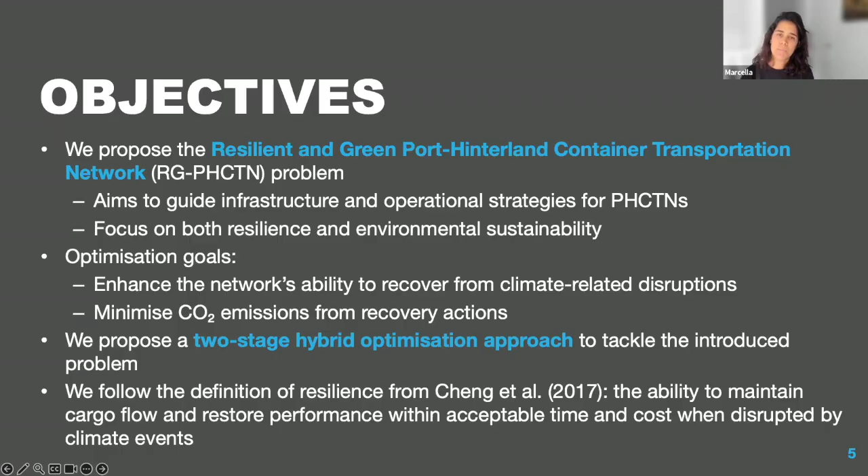Resilience is a term whose definition varies a lot based on the area of research. So we follow the qualitative definition of resilience proposed by Cheng et al., which describes the resilience of a PHCTN as its ability to maintain cargo flow and restore performance through recovery actions within acceptable time and cost when disrupted by CCD events.

So to summarize, the main goal of our new optimization problem is to optimize resilience while also reducing the emissions associated with the recovery actions that we adopted to improve resilience. So I explained the qualitative definition of resilience that we use, and we also adopt a quantitative definition of resilience, which was proposed by Chen and Miller-Hooks. And you can see this mathematical expression on this slide. And just to explain how this definition works.

So in our model, we represent the set of all possible CCD cases by the uppercase Greek letter Xi, and each element, each lowercase xi, corresponds to one sample realization of a disruption type. For example, one instance of flood with specific spatial and intensity parameters. And then in this context, the resilience of PHCTN, which is expressed as a function of lowercase xi, is defined as the ratio between the total number of containers successfully delivered after the disruption and the total demand across all dry ports.

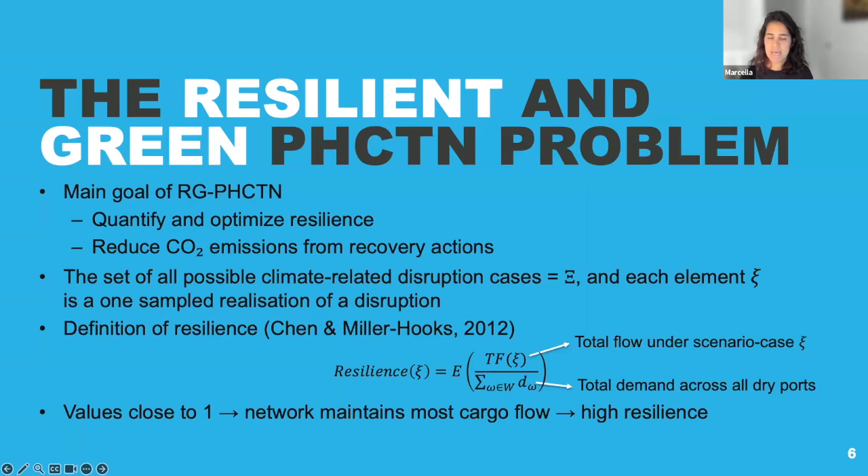To calculate the resilience of a PHCTN, we use a two-stage hybrid approach. It is called two-stage because it consists of two sequential MILP submodels: the seaport disruption response model, which we refer to as submodel 1, and the hinterland disruption response model, which we refer to as submodel 2. Submodel 1 focuses on the seaport level. It determines which recovery decisions are implemented, and based on that, it calculates the restored throughput capacity of the seaport.

Then, given this restored capacity, submodel 2 determines which recovery actions are adopted by hinterland shippers. And based on those decisions, the model calculates the actual container flow arriving at the seaport. The interaction between these two models is important, and I will explain why later on. We also call this approach hybrid because it combines optimization with simulation. Those two MILP submodels are optimization models.

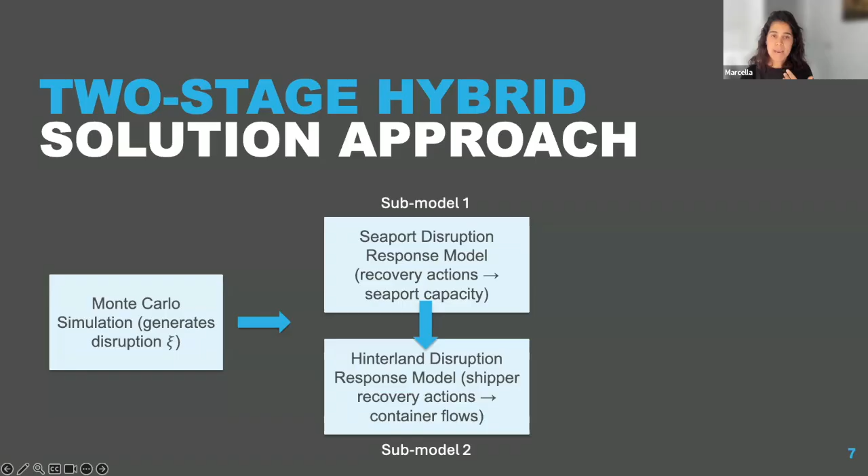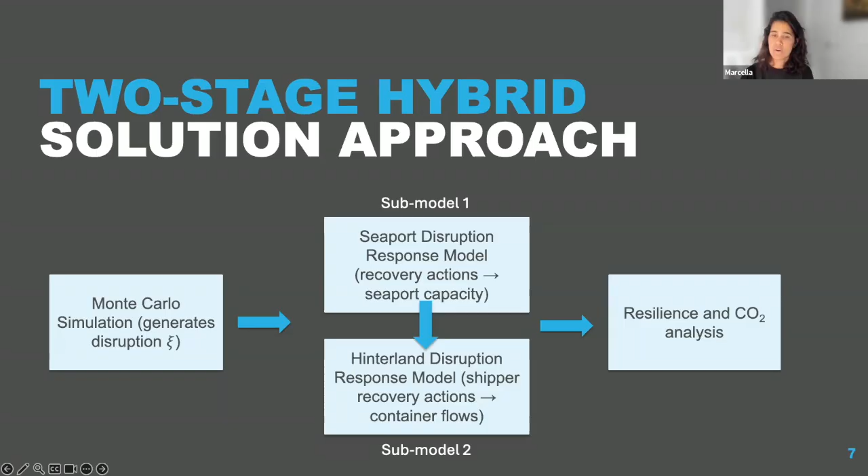And then we use Monte Carlo simulation to generate multiple realizations of each CCD scenario type. For each realization, we solve both MILP models sequentially. And by repeating this process for all realizations of a given disruption type, we can then calculate the expected resilience of the PHCTN across the entire scenario space. So let's quickly look at those MILP submodels to understand them a bit better.

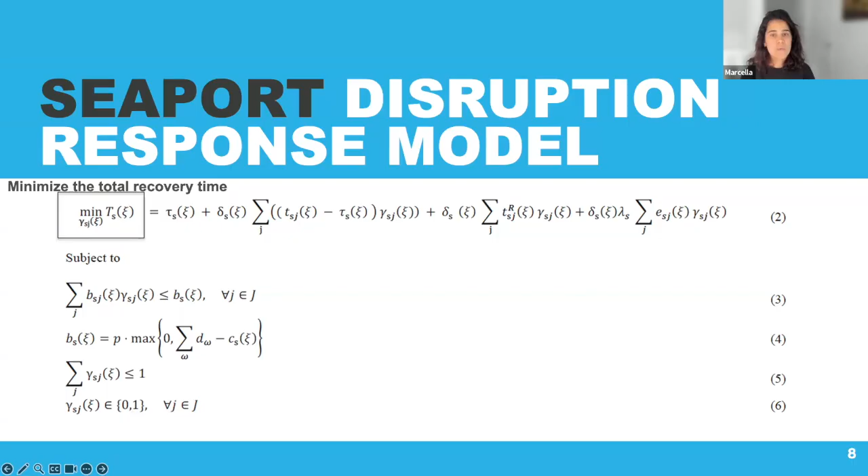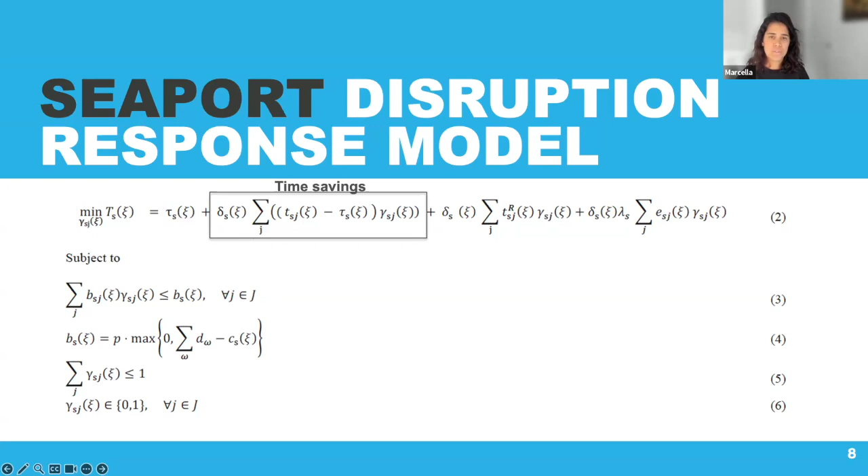Starting with the seaport disruption response model, which is the first one that we solve in our two-stage approach. The model objective function aims to minimize the total recovery time at the seaport after a disruption has occurred. And we can break down this objective function into different components. The first term represents the current operation time of the seaport after the disruption, so before any recovery action is taken. The second term captures the time savings achieved by implementing a specific recovery action j, and this variable gamma sub sj indicates whether the action is selected or not. So this term only contributes if the seaport is damaged and if that recovery action is chosen.

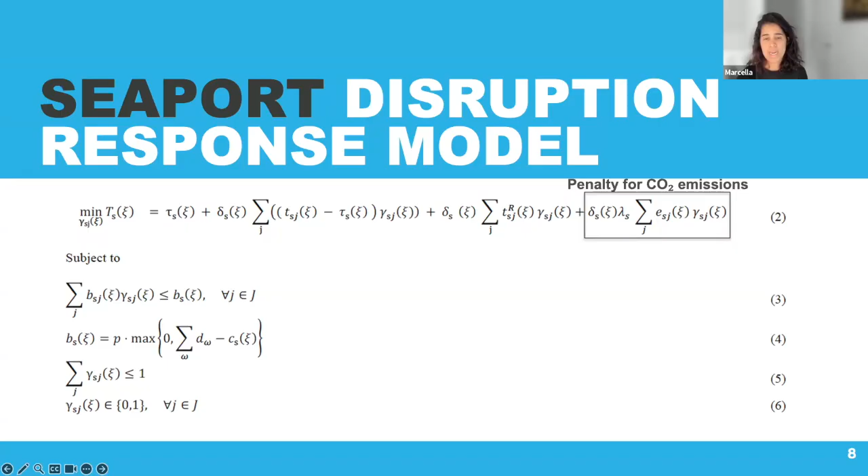The next term adds the implementation time of that recovery action. So it adds how long it actually takes to perform the repair or the recovery action. And the last term introduces a penalty for CO2 emissions generated by the selected recovery action. And this weighting factor, lambda sub S, converts these emissions into time equivalent units so that the environmental impact of that recovery action is explicitly incorporated into the objective.

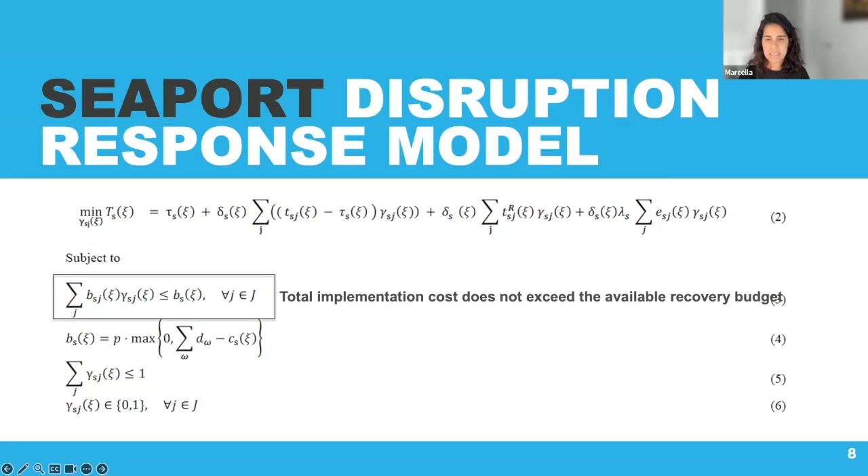And this objective function is subject to a few constraints. So the first ensures that the total cost of the selected recovery action does not exceed the budget available. And the second one shows how this budget is calculated. So instead of using a fixed amount for the budget, this model determines the budget based on the economic loss caused by the disruption. So this essentially means that the more cargo the port fails to deliver, the larger the recovery budget becomes. The third constraint ensures that only one recovery action can be selected.

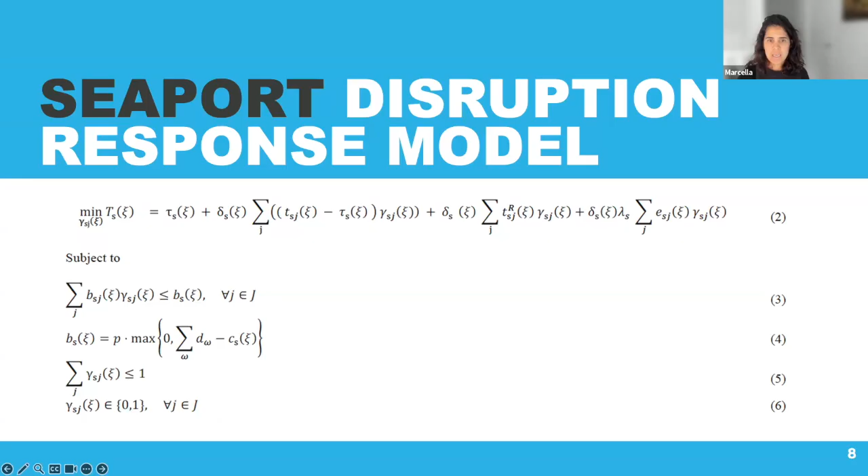And the last one defines the nature of the decision variables. So each gamma sub Sj can only take a value of 1 or 0: 1 if the action is chosen and 0 if it's not. So now that we covered this first stage, how the seaport reacts to a disruption, we can move to the second stage of the framework, the second submodel, the hinterland disruption response model.

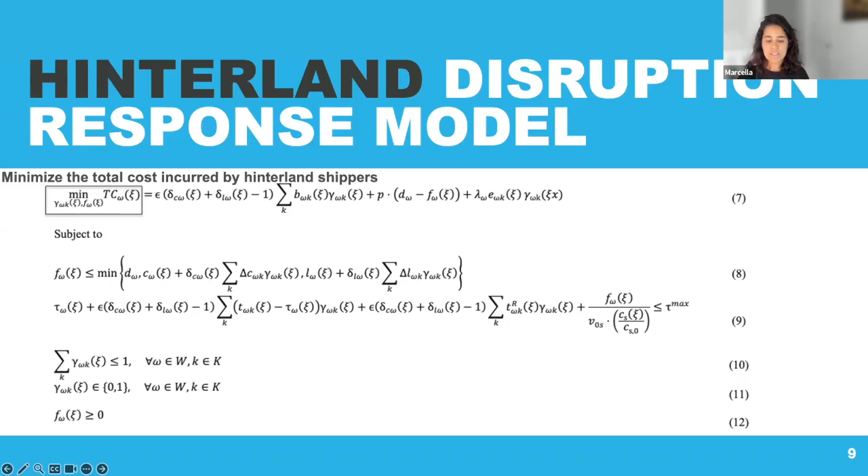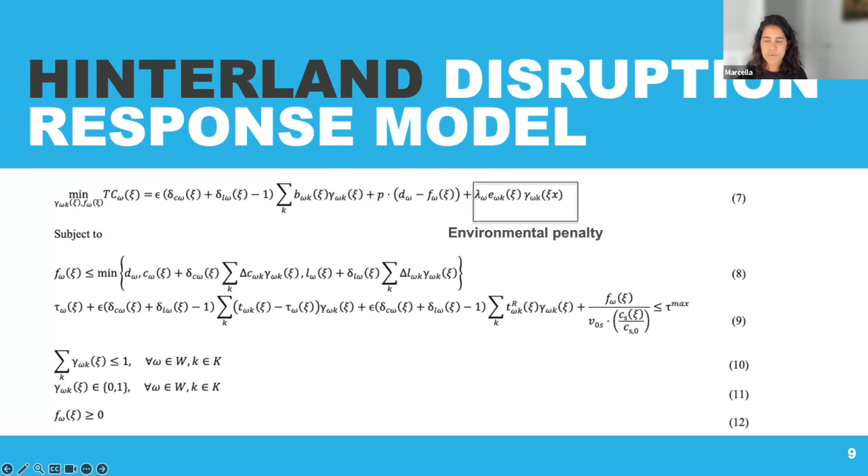The objective function of this model aims to minimize the total costs incurred by hinterland shippers in response to a given disruption scenario. And these total costs include three components: recovery implementation costs, so this is the direct cost of carrying out recovery actions at the dry port or along transportation links; a penalty for unsatisfied demand, so this represents the economic loss when some containers cannot be delivered to the seaport; and a cost equivalent penalty for CO2 emissions, so this accounts for the environmental impact of the chosen recovery action.

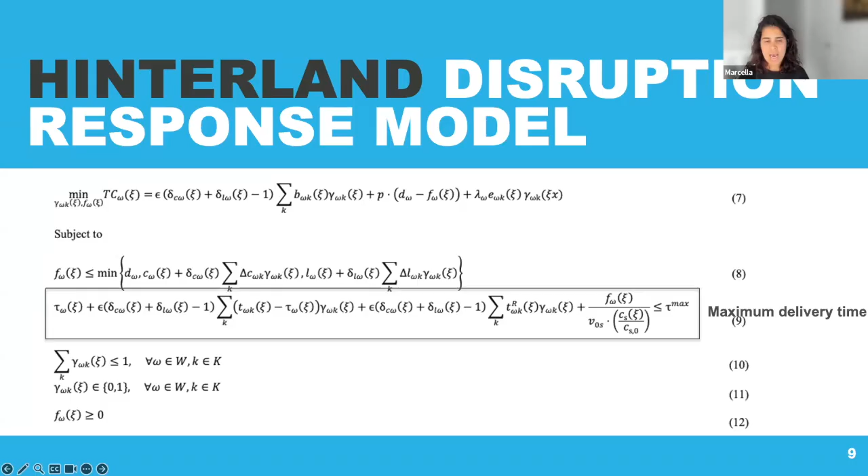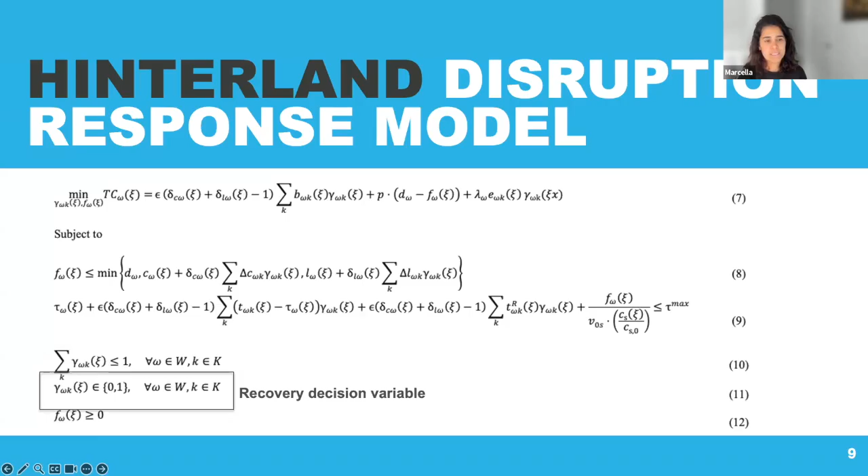And this objective function is subject to a few constraints. So constraint 8 defines the container flow variable F sub omega of xi. So this constraint ensures that flows in the network remain physically feasible. Constraint 9 imposes a maximum delivery time limit. So it ensures that the total transport and handling time does not exceed a predefined threshold. Constraint 10 makes sure that only one recovery action can be chosen for each dry port. Constraint 11 defines the recovery decision variable as binary, and constraint 12 ensures that the container flow variable is non-negative.

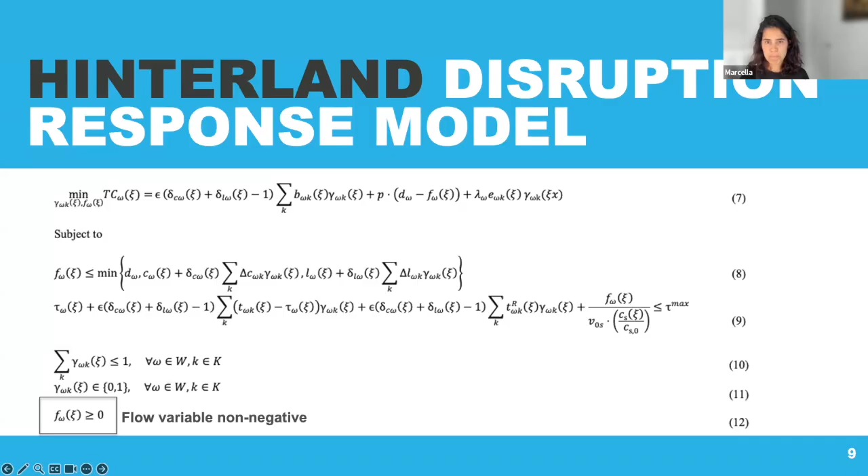Taking the minimum of these two values ensures that the two-stage approach respects system level bottlenecks. And what do I mean by that? If the seaport recovers slowly, it becomes the limiting factor. So the restored capacity of the seaport is the limiting factor. On the other hand, if the hinterland suffers heavier damage, if that restored capacity is smaller, the inland side becomes the bottleneck. And once we know the total container flow, so the demand that is actually met after a disruption scenario occurs, we can then calculate the resilience using the formula introduced earlier.

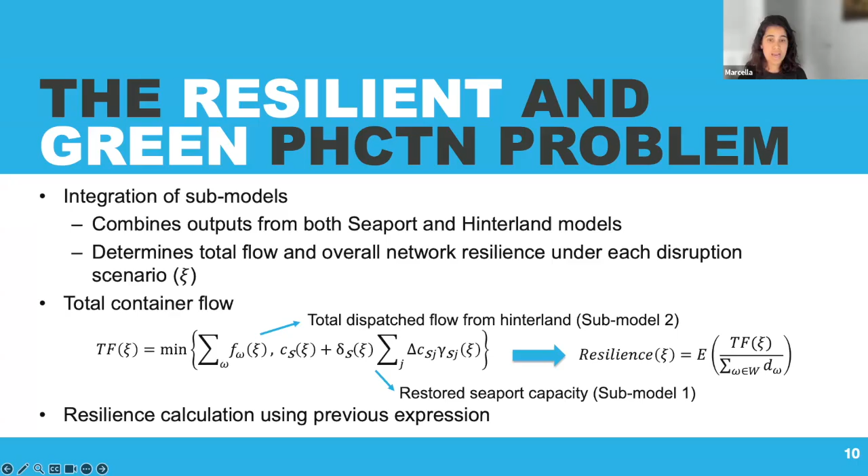So now moving to the computational experiment. So what do we get when we apply the two-stage solution approach to a PHCTN? To find that out, we created a synthetic network inspired by the Port of Newcastle in New South Wales. So this network includes the seaport itself and 3 inland dry ports that represent hinterland terminals. We assume that the network is fully connected, so every node pair is linked by transportation options. At the start of the analysis, all links are assumed to operate at 100% capacity, and this represents the baseline with no pre-existing disruptions.

For simplicity, the layout is constructed using Euclidean distances between nodes, and we do that to approximate transportation costs. And so overall, we believe that this setup provides a controlled yet realistic environment to get the computational results. We investigate the performance of the designed network under specific CCD scenario types. We focus on the Australian context and design 3 disruption scenarios: flooding, cyclone, and bushfire. These scenarios are based on what Sims and Cannondale explain in an article for The Conversation about climate change impact in Australia.

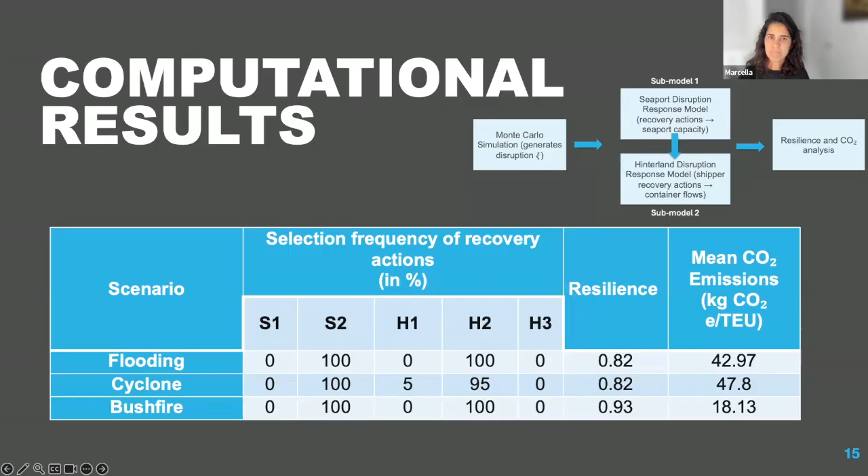To conclude, our experiments on a synthetic Australian PHCTN show that the proposed framework produces plausible and interpretable results in terms of resilience, CO2 emissions, and recovery strategies. And so these findings demonstrate the strategic value of the approach for supporting decision-making in PHCTNs to deal with climate change CCD events. One of the key strengths of the framework is its modular and flexible design.

This means that we can easily adapt the recovery actions, the cost factors, emission coefficients. A lot of things can be changed in this framework based on infrastructure in different contexts. Also, the sequential MILP structure ensures transparency and scalability. The features, so different objectives, constraints and network features, can be integrated without redesigning the entire models.